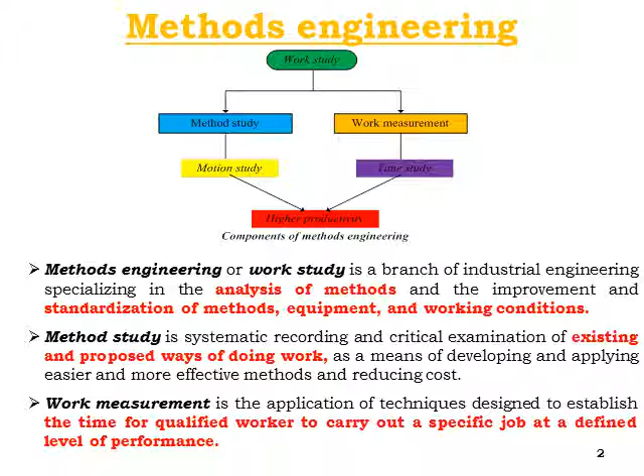The basic intention while doing method study is increasing productivity - that is our objective. While doing method study, the first thing to keep in mind is that we will try to optimize the present way of doing work.

The second thing to understand is that we will try to break down the entire job into small operations, and remove the non-value added components. We will only keep the value added components and eliminate the unnecessary operations.

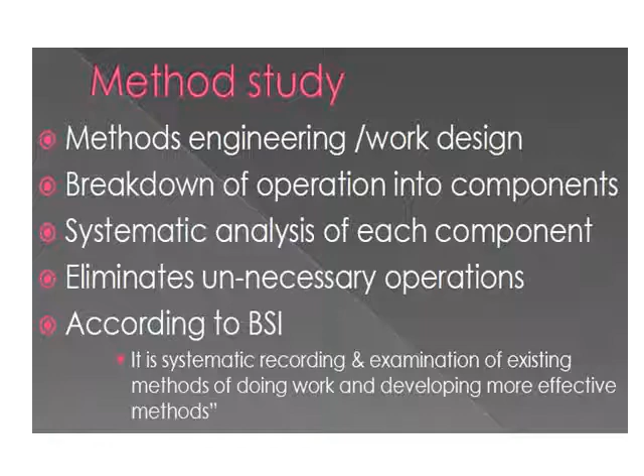So the definition of method study is: systematic recording and examination of existing methods of doing work, and developing more effective methods. We study the method we are doing now, and check what the area of improvement is. So what are the objectives of method study?

For what purpose are we doing method study? The first objective is standardizing the best method - we try to eliminate non-value added or ill-directed motions, and find the best way of doing the work.

Second is improvement in the layout. There should always be scope for improvement in the layout - we develop a better layout by establishing methods involving smooth and continuous flow of material, ensuring continuous flow by reducing stoppages between motions, and ensuring the work environment is safe.

The fourth objective is effective utilization of resources - we ensure that we utilize man, material, machinery, etc. in a very effective way.

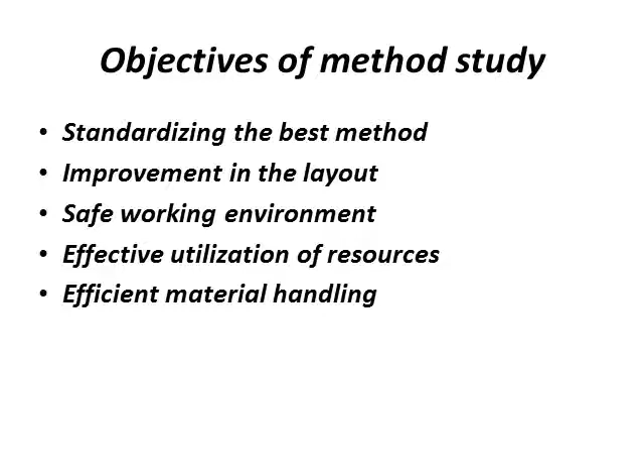The last one is efficient material handling - we ensure that material movement and material handling will be in a smoother way. So these are the objectives or goals of method study.

Now we need to know the procedure for doing method study - the basic procedure, which is very important from an examination point of view. These will be the different steps in method study, as shown in the slide. The first step will be 'select'.

What will mean by select? Actually, select means selecting the job or process to be studied. We need to fix which job we are going to select, which job we are going to improve, which method we are going to improve. We can select the method or job based on many factors.

It can be based on economic considerations, like which job has more investment that we have to select, or it can be based on technological consideration, or it can be based on human consideration. If you want to improve the working condition, we also want to consider the human factor. The first step is to select the job which we are going to improve.

The second step is record. Through recording, we will collect all information related with that job. Basically, after we collect all type of information, we will display it into some forms. Usually we will use charts - we will discuss the different types of charts we will use - and it can also be diagrams. So record can be used as the collection of data.

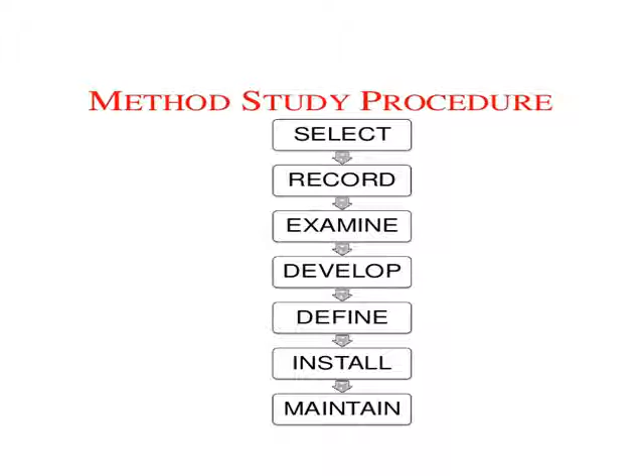From the examination point of view, the procedure of method study is very important. So what are the recording techniques we are using? After selecting the job which we need to improve, we need to record it - we need to collect the whole data related with that job in a proper way.

Usually two things are used for recording: one will be charts, another will be diagrams. The first way of recording is using charts. The second way of recording is using different diagrams.

So what are the different charts we are using in method study? Usually it can be micro motion charts or macro motion charts. We will look into detail, but basically we will give more weightage to macro motion charts, as these are more common in any industry.

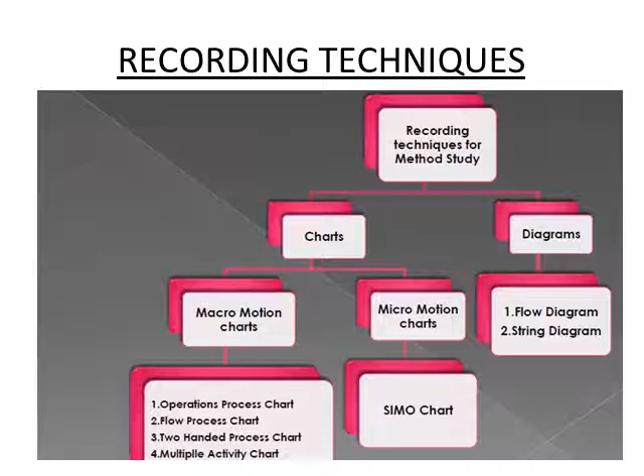There are many types of macro motion charts, like operation process chart, flow process chart, two-handed process chart, multiple activity chart, etc. We will discuss each chart in detail.

Before moving to charts, we need to know the basic operations and basic symbols used in charts. While preparing a chart, we can't write much wording there - we need symbols. Basic symbols are five; there are five basic symbols used in any type of chart, and these symbols are common in every work. So what are the basic five symbols?

The first one is operation, usually denoted by a round circle symbol. What does operation mean? Any activity we are doing in an industry, we usually call it operation. It can be turning, drilling, milling - whatever the operations we are doing, we represent them by the operation symbol.

The second commonly used symbol is inspection, represented by a square. Inspection is one of the most important activities in any industry, so inspection is another symbol we need.

Third is transportation. There are many movements in the industry - it can be movement from one workstation to another, from storage to workstation, or from the workstation to the final assembly, whatever it may be. So we also need a symbol for transportation.

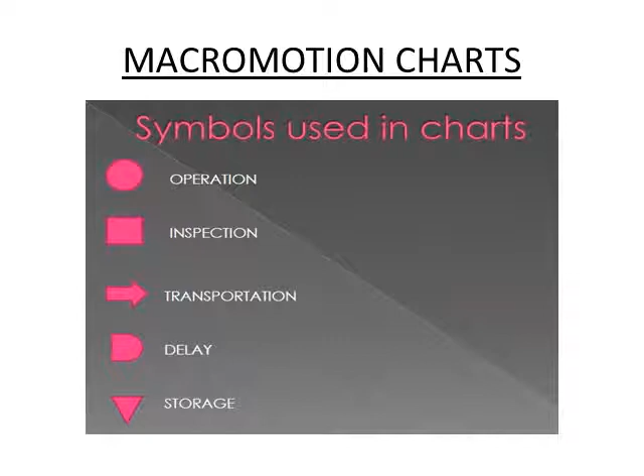So these are the basic symbols used in any type of chart. Apart from this, there are two other symbols which are not the basic symbols. The first one is inspection cum operation.

In many scenarios in the industry, both operations come together, inspection as well as operation occurring simultaneously. Like when we are powdering milk, it is being weighed as it is filled. We need to measure the weight of the milk. We will fill the milk and at the same time measure the weight.

So that's inspection cum operation. The second one is operation cum transportation. We will have both things together, operation as well as transportation. A very common example is the assembly line, where the material is moving as well as some operation is being done.

Consider an example of a car. The car parts are moving in a relay on a conveyor, and at that time the painting is going on. So two things are there, the materials are moving through a conveyor as well as painting happening. That is operation cum transportation.

These are the other operation symbols we are using. So these 5 plus 2 are the basic operations usually used. You will see these in any type of chart done in a common way.

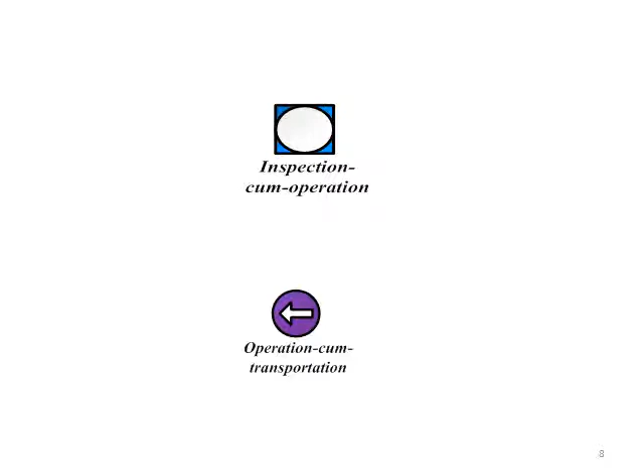We will now look into the different types of process charts commonly used in industry. The first one is usually called the operation process chart, or outline process chart. The intention of this type of chart is to give a bird's eye view of the entire process. By looking at it, we get a clear idea of which operations are involved and what will be the flow of material. It gives an overall quick idea of the entire process from beginning to end.

In the operation process chart, we use only two symbols, one is operation and the other is inspection. This chart does not show where the work is going on, whether there is any delay between the works, or whether inspection or transportation is happening between one workstation and another. Nothing like that is shown, we only look at the operation and inspection.

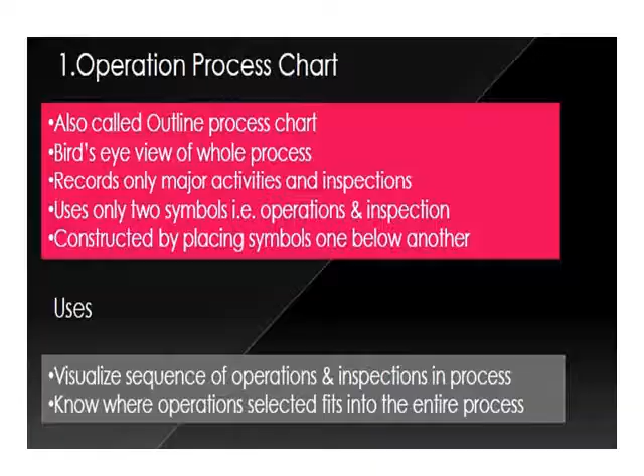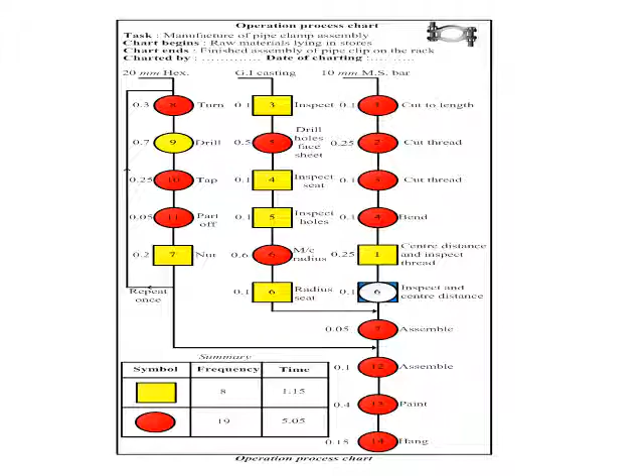Hope it is clear. We will move to another chart, the second chart, that is the flow process chart. Actually, the flow process chart is the amplification of the operation chart we explained before.

A flow process chart is a complete chart which gives the sequence of flow from the basic operation to the end. It gives all things like operation, inspection, storage, delay, transportation, all operations together. While looking at the flow process chart, we get a clear idea of how many operations there are, how much time each takes, which storages are there, where materials are stored, whether there's a delay, inspection, or transportation.

The flow process chart is usually constructed for different purposes. It can be constructed for material type, showing how the material is moving. It can be prepared for man type, showing how the workers are moving. It can also be prepared for equipment type, showing how equipment is used.

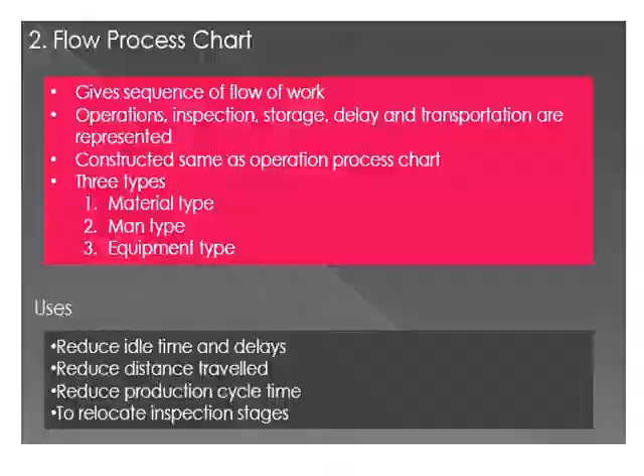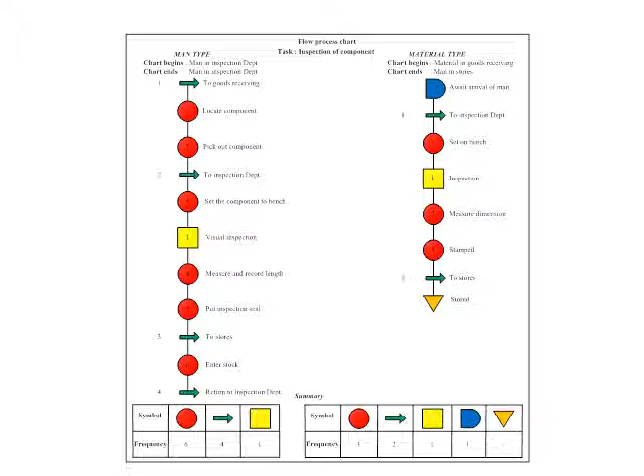So the flow process chart is another major type of chart commonly used in any industry. Look at this figure - it's a real figure I got from the net, showing how flow process charts are prepared.

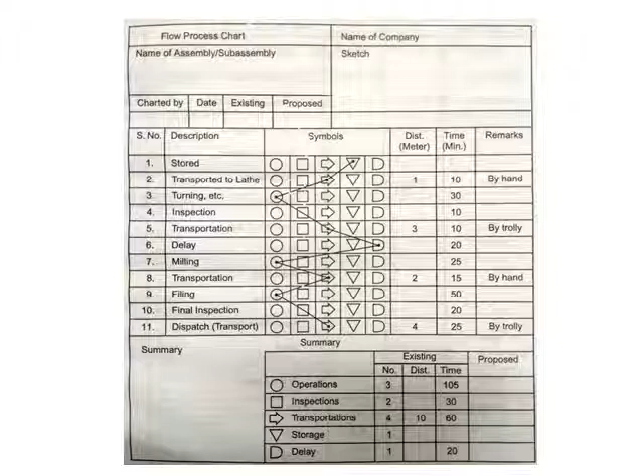For a worker, materials move from stores to turning, then inspection, then delay, then milling, transportation, filing, final inspection - like that, showing how operations move, how much time it takes, the distance, the movement. If we look at the figure, SL number 2 is a transport, so how much distance is it moving? Number five is transportation - how much distance is it moving? Like the time and distance, this is a real flow process chart prepared in an industry.

So that will be the second type of chart. The third type of chart is another interesting chart called the two-hand process chart.

Actually, the two-hand process chart gives information about the activities of a worker. It has two components: one gives the activities of the right hand, the other gives the activities of the left hand. By looking at the two-hand process chart, we can clearly say which things the worker is doing, which operation is done by the right hand, which by the left hand, and how there's a chance of improvement.

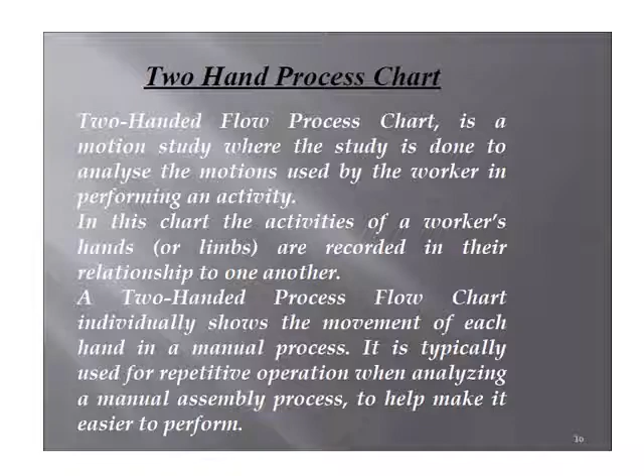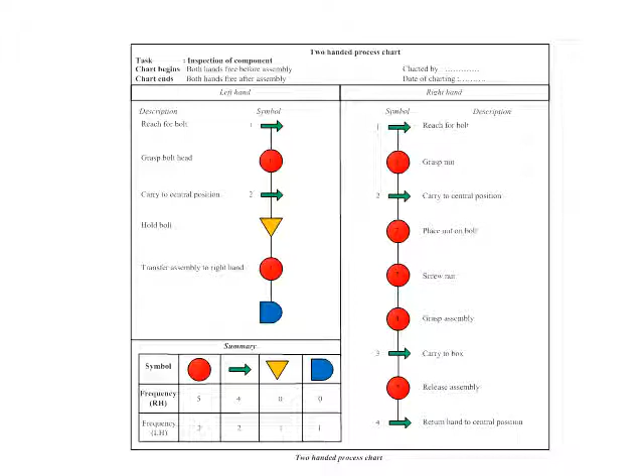Like that, we get detailed information on whether he is using both hands or not, which hand is used more, and whether there's any chance of improvement by using both hands. This will be an example of the two-hand process chart, a real figure of a process chart prepared for an industry.

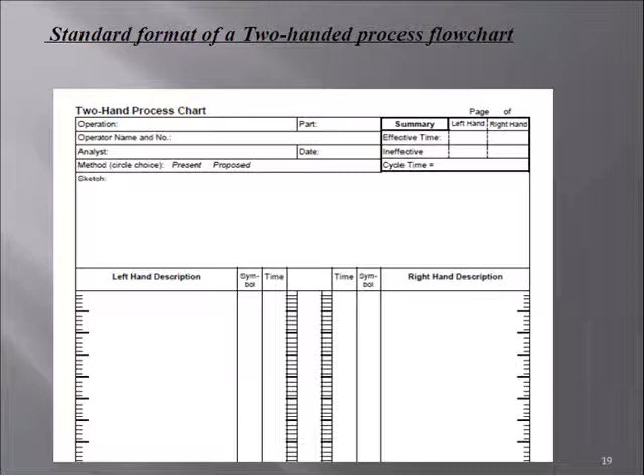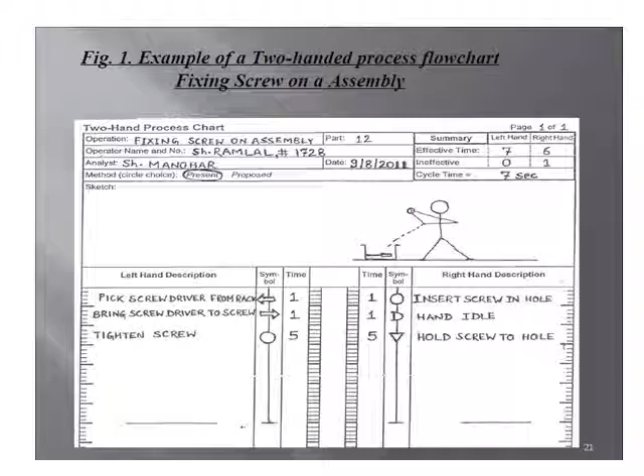This will be the first part of our presentation. This is an example of how the industry filled this for a worker called Ramlal. The operation is fixing a screw on an assembly, showing how his left hand moved and how his right hand moved.

So this will be our first part. Then we will move to a second part discussing diagrams as well as other details like the micro motion study, etc. Hope the first part is clear for you. Thank you.